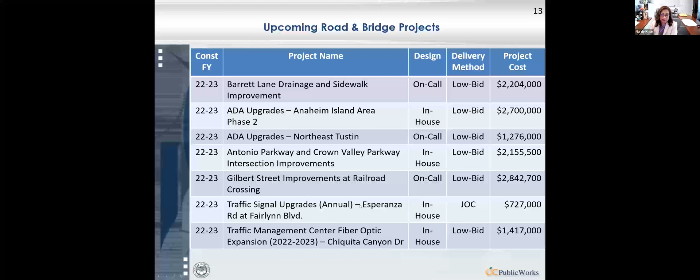It's one we're working on. We also have traffic signal upgrades at Esperanza and Fairlynn as part of our annual program, and that's through OCTA. It's a cooperative project as well. And the Traffic Management Center, like I pointed out earlier, we're just continuing to expand our fiber optic capabilities.

So projects I have on this screen, and as we go forward, you'll see this. Anything in yellow would be something where we have an opportunity to engage a consultant or where we don't have somebody assigned to that work. So I wanted to offer that because I know folks have an interest again in seeing upcoming work.

Starting with some of the projects that we are doing and where we already have someone, we have the 5 Canyon bridge replacements. You've got 2 of them here. Total, we have 3 in Silverado Canyon, 1 in Modjeska, and 1 in Trabuco. These are all funded by the Federal Highway Bridge Program. So for these, we always do an RFP in order to be able to meet all of those federal requirements, because we can't typically use our on-call agreements for something like that.

And ones that we do have coming up, I'll expand a little bit more on the next slide. Our Coast Highway, Bikeway, and Pedestrian Bridge at Capistrano Beach. We have slated for 23-24, but we're kind of in a holding pattern on this one. There's a lot of erosion on the beach in this area, and we're trying to see what the Coastal Commission will allow the state beach to do in that area to determine what the need is for this bridge to continue to be present, because it really does connect to a state beach. So depending on what happens to the beach, the bridge will follow accordingly.

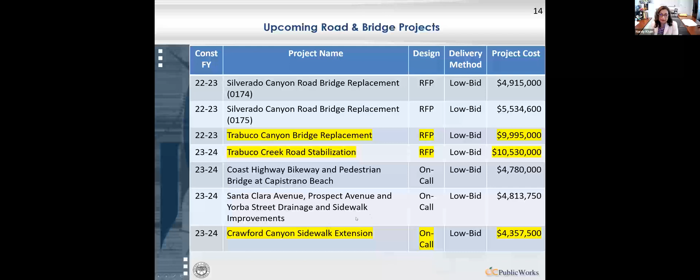These are the upcoming projects, just to highlight these separately. Our Trabuco Canyon Bridge replacement. This is the bridge that gets flooded regularly when there's a storm event. We get debris, we've lost rail. It's really a troublesome area for us. So we are looking to replace that bridge.

Kind of adjacent to that area, we have Trabuco Creek Road. And that's, as you can see here, out in open nature area. It's an area we really can't pave due to the resources that are in the vicinity. So we are looking at some alternative solutions that will be consistent with the surrounding environment, but that will reduce some of the dust that is coming out of the facility right now.

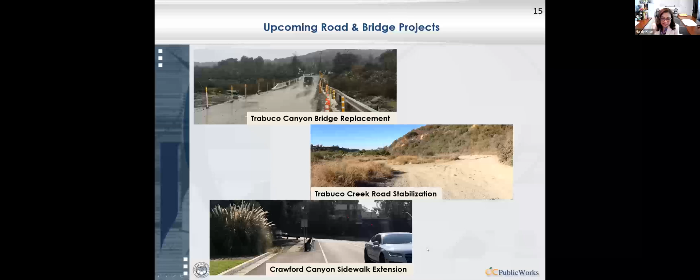Our Crawford Canyon sidewalk, we're also looking at extending that. As you can see, you've got a sidewalk that pretty much abruptly ends here as you get to the light here. So we're looking at extending that. And we have our Modjeska Canyon Road Bridge project.

So just real quick on the projects that I showed before, we are going to be having proposals for that work. Back to this one here. Sorry for going back and forth there for a second. Modjeska Grade Road, we're in design. We're slated for construction. We're probably going to push that one out to fiscal year 24-25, as we have here.

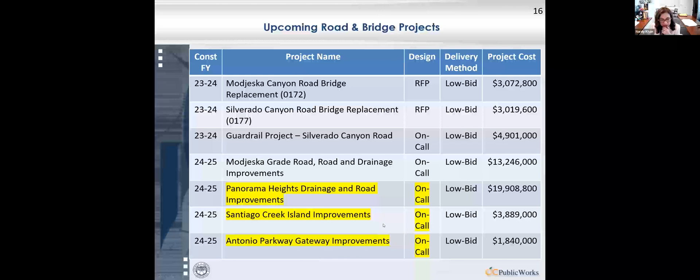Let me make sure I get all my notes here on these projects. We have the Panorama Heights drainage and road improvements. Let me come to the upcoming projects, and I'm happy to answer questions on some of the others that we're working on as well. But I don't want to go over my time, so I'm kind of skimming through some of these. For the upcoming projects, we have Panorama Heights.

As you can see here, we have some pretty narrow streets, not a lot of drainage features. We do have flooding in some of the homes. It's pretty hilly. Right of way is very constrained, so this is going to be a challenge. But we do want to assess the area as a whole and see what we could do to help improve the community as far as drainage.

Santiago Creek Island improvements. We are constructing a sidewalk here for ADA accessibility, and we're also upgrading the traffic signal system at the intersection of Villa Park and Hewes.

And last but not least, the Antonio Parkway Gateway improvement is going to be a raised median along Antonio Parkway. The city has some planned improvements here. We were going to be working with them, but it looks like now we're doing our work separately.

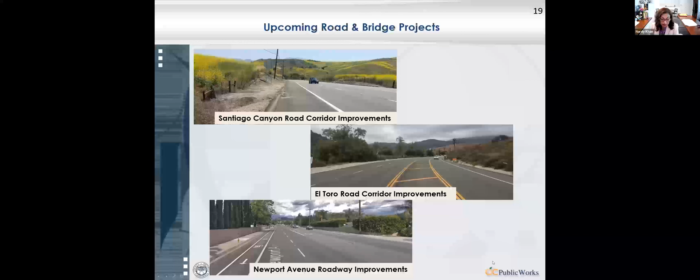And the Newport Avenue roadway improvements, which is in planning, with construction expected in fiscal year 28 to 29. So that one's still out in the future, and we would be doing raised median and pavement rehabilitation.

A lot of work happening. So on the flood side, as you can see, East Garden Grove, Wintersburg — I know I had that picture starting up at the front. I think it's one we definitely want to highlight because of its significance in the community. Like I said, it's in levied condition.

And then next will be the bridge projects. After those, these are the three projects where we still have not designated a consultant to get started: we have the Warner Avenue Bridge downstream of that area, and we have our tide gates and the Ocean View Channel section.

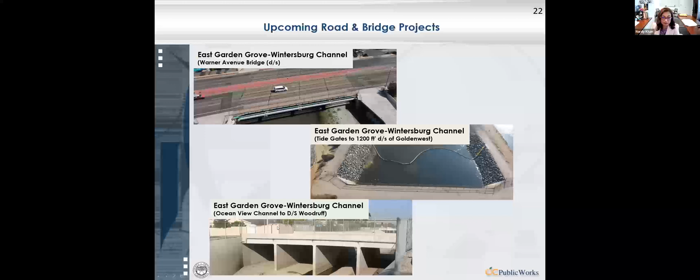So again, more flood projects coming in that regard. Just a note on those real quick — a lot of that work is sheet pile, widening the project. Each reach will have to be a little different, and of course the bridges are going to be slightly different as well, but we're just trying to get as much capacity and resiliency as we can out of that facility.

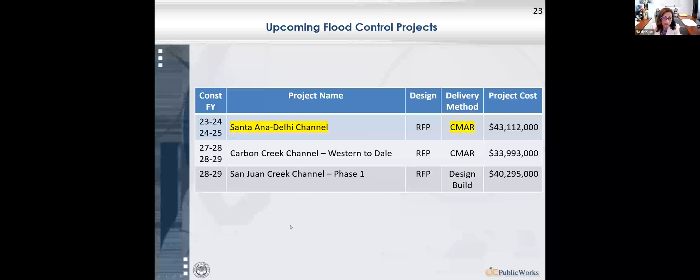So I'll pull Santa Ana Delhi out separately, just a view of that channel. This one is in preliminary design. We're expecting to go into construction fiscal year 23-24, and of course we're going to target the 100-year flow capacity and decreasing scour across the channel and into the upper Newport Bay. We're going to create some habitat. This project, in addition to being a flood capacity project, also serves as mitigation for prior reaches of the Santa Ana Delhi upstream.

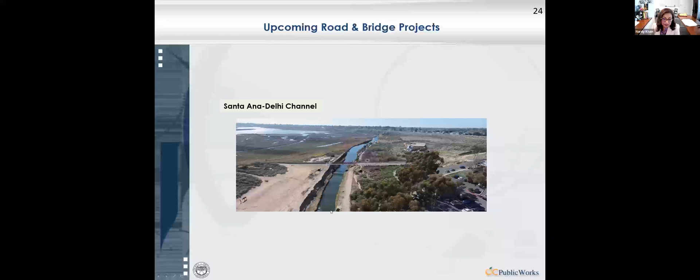On the bikeway side, as you can see, OC Loop comes up repeatedly. Our goal is still to complete the OC Loop. OCTA has come up with a new plan called OC Loops, with an S, that in addition to creating the 66-mile loop through the county, creates some traverse connections for the loop. Imagine it kind of like a ladder, putting those side connections in. But again, we're still working on the loop — the loops is in planning.

Projects that we have in this area: we have our Santa Ana Gardens Bikeway extension. This one's a low bid project — we just had this one awarded at our last board meeting, so this one's moving forward. It's a continued bikeway extension utilizing our flood control channels, and it is something that where possible we do. We'll work with the city — they'll take on maintenance of the facility, and we can help out with either some of the improvements or in a cooperative project, so that the public can enjoy the facilities for recreation.

We have our OC Loop segment D. That one's along Carbon Creek Channel.

So the first question is: on the projects shown highlighted in yellow under the upcoming road and bridge projects list, are the ones in yellow the only ones that are going to be advertised to consultants? Yes, let me go back here. I think the question was specifically about road and bridge, so these right here are the ones where we would be seeking consultant resources.

I'm happy to provide the presentation because I know it's difficult to take notes as we go through. For example, here we have this highlighted as an RFP for design, so we would be doing a solicitation for proposals on this. On this Newport Avenue roadway improvement, for example, we plan to do this with the on-call agreements that we have, so we'll be going through that list to identify a consultant.

Can you tell us, along those lines, if the project's not subject to federal funding—is that basically the delineation in a lot of cases about whether it's under the on-call or not? Yeah, definitely. For an RFP versus an on-call, in general terms, there's some specific requirement where we feel using an on-call would be potentially problematic, so we'll do an RFP for those. One example is federal projects.

Because they may have a DBE requirement, or the grant itself may require that we post for that one specifically, it really just depends on the project. For these projects, we're looking at 25, 26, still a few years out, so it's subject to change. But at this point, from everything we know about the project and the type of funds we anticipate getting, our plan is to do an RFP. So this is our plan.

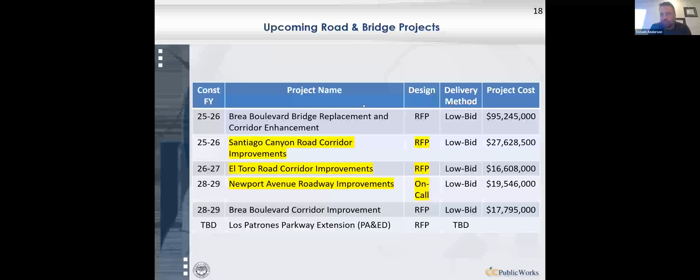For the bike projects, we didn't have anybody highlighted here because we already have someone working on these projects. It's possible we'll need supplemental services, but we have a main AE firm working on them. That's why we haven't highlighted them.

When we're talking about flood mitigation and road mitigation, are we talking about environmental mitigation? Could you be more specific? Yes, environmental mitigation. If it had to do with building a wall or doing something to reduce noise for a roadway project, for example, we would include that on the project cost. The one we identified separately is any environmental type of mitigation, like establishing or maintaining habitat, or purchasing credits, anything of that nature.

From Dina Roquefort: could you talk a bit more about the SNA and the transfer of consulting oversight? About SNA, yeah, can you be more specific on what SNA is? I think JWA, John Wayne Airport, yeah. Oh, I thought you said SNA. Oh, that's the acronym for the airport. Sorry, it took me a second to connect the two. So for the John Wayne Airport...